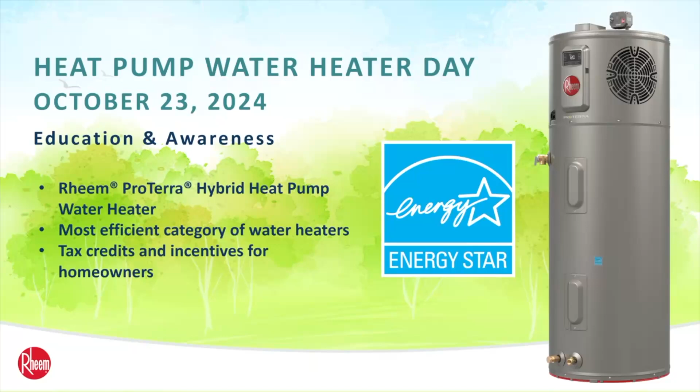We're coming to you live today because it is National Heat Pump Water Heater Day. Joining me is Robert Hayworth, one of our plumber support managers. He's going to step you through some of the heat pump water heater technology and these Proterra units, talk about some of the features and benefits, and also the things you need to know as the plumbing professional who is selling, installing, and servicing these units.

Thank you, everybody. Thanks for having me here for this great occasion, which is Hybrid Heat Pump Water Heater Day. Today we're going to discuss a recap of our hybrid water heaters. We have a Generation 5 out in the marketplace, and we just came out with our refresh. I'd like to talk about the bells and whistles, benefits, and how the system works. Right here behind me is our 40-gallon hybrid builder model.

So this is a hybrid heat pump. What is a hybrid heat pump? It's two units together that create hot water. This is a heat pump, like a reverse refrigerator, and this is a traditional electric water heater with the elements. Next to it is our refresh, and we'll talk about that in a second. But how does a hybrid water heater work?

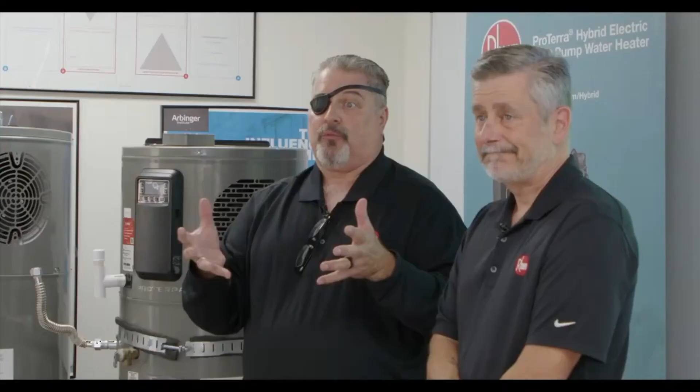With NAECA 4 in place, which means the government is actually enforcing energy savings on water heaters, a lot of the water heaters on the market today are going to be gone in 4 years. So might as well act now with the rebates and incentives that are on the marketplace, so that in 4 or 5 years the customers won't get that sticker shock.

Now if you're going to run ducting in the attic, you got to treat it like plumbing, guys. You can't have hills and valleys in plumbing, right? So when you do ducting in your attics, make sure that ducting is as straight as possible, because for every up and down bend you get in there, you have restriction. And that restriction creates back pressure on the system, which will cause problems. So you want it as straight and clean as possible, without any restrictions.

If you've got a full length of ducting, don't compress that ducting and hook it up just because you only need 5 feet. Cut it. You want that to be a pure 5-foot piece instead of a compressed 10-foot piece, if you're doing that flex.

Any questions on ducting? There's more stuff you can do.

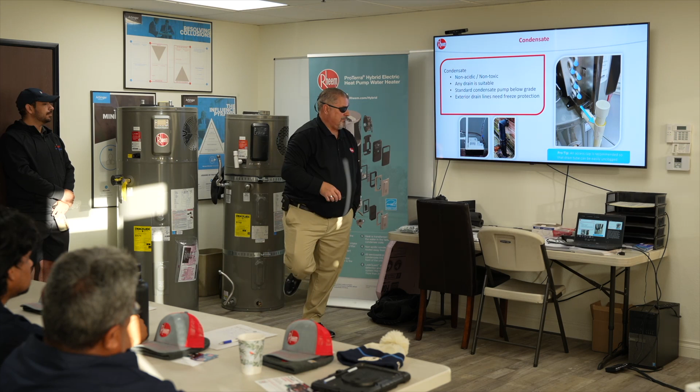Condensate, I already told you about — just make sure you take care of it. There are leak sensors in there, so just like on the AC system, if that pan inside fills up with water, it has a leak detector in there, and it will throw a code and shut the system down.

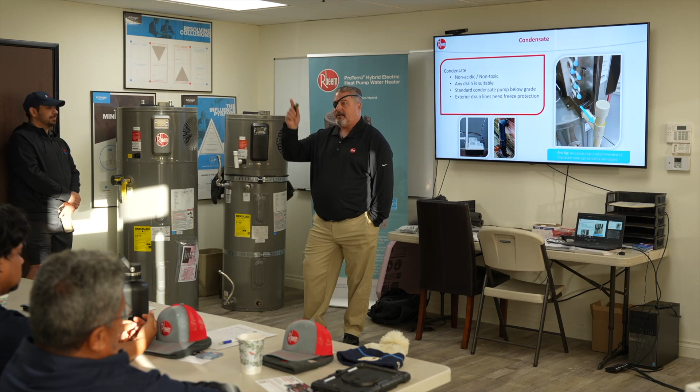The cool thing about this system is that if there's ever any issues with the heat pump side, you can switch it to the electric side. So you can call your customer, say Mrs. Jones, switch it to electric only until we get out there, so that way you have hot water while we fix the issue with the heat pump. Or vice versa — turn off the electric and turn on the heat pump. You can actually do both sides, so the customer, or you guys, have the ability to switch it between the modes.

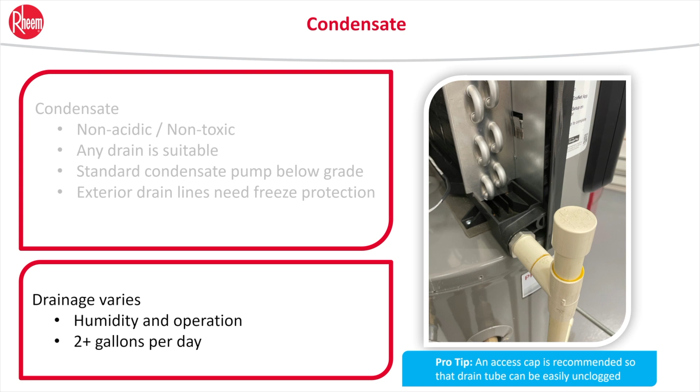PVC or CPVC is recommended. It's 2 gallons per day, not a lot of water, right? But if somebody's on vacation for 2 weeks and the AC system shuts down, and you have it tied into AC, 2 gallons a day can cause a lot of damage to the house.

How are we doing on time? Doing good? All right, once again, noise - just be familiar with your areas, okay, where you're placing it. Make sure you have your isolation stuff in there.

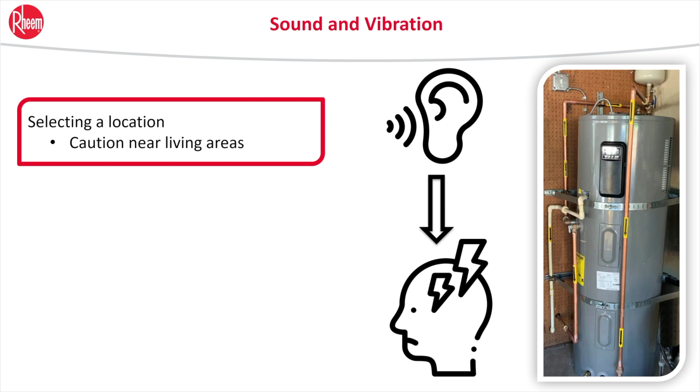I had a plumber get a call in the middle of the night because the guy's trophies on the back wall in his man cave fell off because of vibration. So it can happen, okay? We can have isolation kits as well, so there's also those you can purchase.

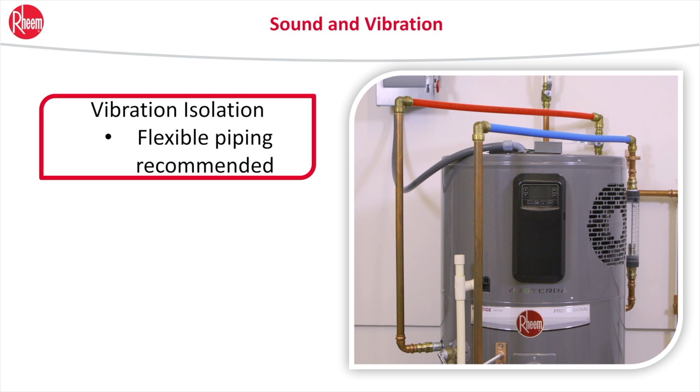Once again, flex - I know you're all looking at that saying, SharkBites? Do whatever you want to do. This is just for demonstration purposes. All right, how do you get it from point A to point B?

What's the proper way? Especially if you're going to be going down a country road, you want to make sure that the vibration is eliminated, right? We recommend that you transport these bad boys straight up. That's not going to be possible all the time, right? So if you have to lay them down, there's only one way to lay them down to make sure there's no issues with the system.

Once you get the box - and we have the box outside so you can look at it - on all three sides there's going to be a label that says hybrid. There's one side that doesn't have anything on it. That one side has to be faced up into the ceiling. And the whole purpose of that is there's a compressor in here, right?

Have any of you picked up a compressor before? Is it light or heavy? It's heavy. So what happens is if that compressor's laying down on its side and you don't have it in the right position, it's going to vibrate and move. What could happen is it could go out of position, rub up against some metal or pipe, and cause a little humming noise or vibration inside the system before you guys even do anything. So if you place it the right way, there's protection inside to keep that in check.

When you put it in your trucks, put some blankets underneath there, or a towel, or foam, and strap it down, especially if you know you're going to go up in the mountains or on bouncy roads. Just protect it as much as possible.

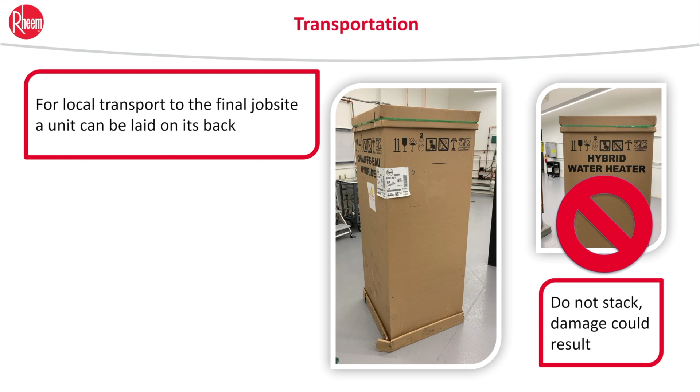Now another question that always gets asked is, you can't lay a refrigerator down - if you do, how long does it take for that refrigerator to recover? This bad boy right here can recover within the hour. We design it a certain way so the fluids don't get lost all the way, and once you stand it up, within an hour's time you're basically ready to go. But give it that little bit of time before you turn it on.

You just can't slap it in there, fill it up, and turn it on. You've got to give it a little bit of time to recover. Any questions on transporting? Okay, that right there will save a lot of issues out in the field.

All right, we already talked about that - sorry, I skipped through it. Recirc - you can add recirc on here.

If Mrs. Jones out in the field wants to have recirc 100% on all the time, this system is not for her, because the recovery factor is just not there. It's designed to operate with an on-demand pump system and a sensor with temperature up to 102 degrees, so that way it has it in check - it comes on once in a while, not all the time.

So it can have recirc. What else can it do? Well, what other kind of recirc? There it is, 102 - I was right. I thought, did I say it right? I said it right, 102. All right, I'm not that old after all.

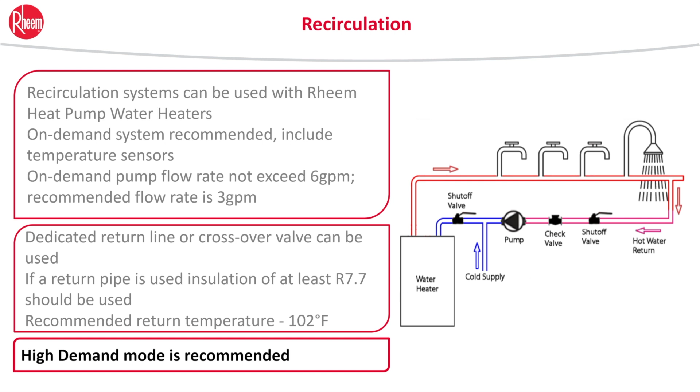Crossover tees, let's see... So there's a PDF out there that we can provide you, especially out in the plumbing world, that shows you step by step how to do recirc. And it's also in the app, so just so you guys know that's available, we can give that to you if you need it.

Why is not my crossover tee in here?

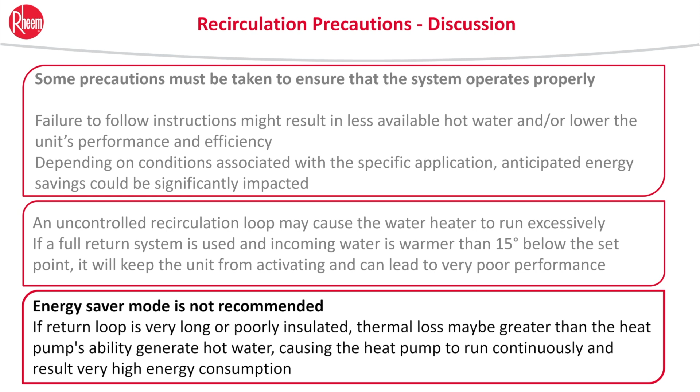Somebody asked me if they can do a crossover tee. They did a crossover tee one time, but it has to be a timer-based system. Remember, on your controller you can do an app and schedule it. So if you do a crossover pump system, you can actually do that on a timer base.

Title 24 here in California wants on demand. But out in the marketplace, plumbers have put them on with a crossover tee as long as the pump is scheduled with the app. Can we put like a comfort series bypass system on there?

Yeah, so you have to utilize the clock. So if your clock's going to be from 5 a.m. to 8 a.m. on your app, that's in high demand mode. You want high demand mode functionality on that type of install. Any questions? All right.

Simple, easy user interface. Enabled is pretty simple. On, off. Quick and easy, okay? Temperature, up and down, quick and easy. You can also do all that with your app. On, off, up and down, okay?

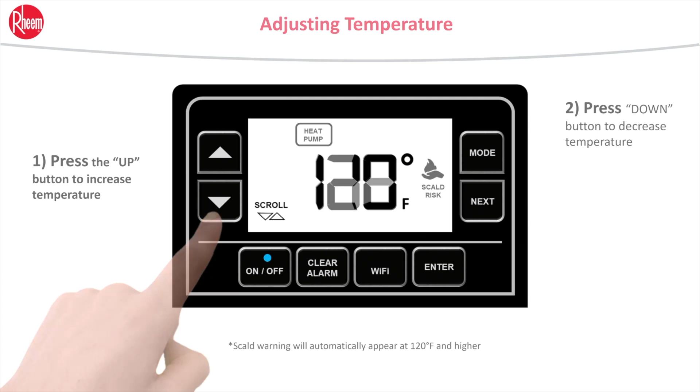Mode settings, just hit your modes. There's multiple modes on here, and we'll go through that real quick. Just hit mode, and these are the modes that you have. You have energy saving mode, it's a default, so if you don't want to touch it, you just plug it in, fill it up, get the water and air out, turn it on, it's automatically energy saving. If you have a bigger unit, 40 gallons would be okay, you can do that with, but a bigger unit, 50, 65, 80, it is recommended that you switch it to high demand mode as soon as you get all the air out.

Anybody want to tell me why that would be a good thing to do? Because energy saving mode switches to heat pump only. 80 gallons of water, especially in the wintertime, is going to take a long time to recover, right? So as soon as you're done, switch it to high demand mode. That 80 gallons is going to switch on the elements and the heat pump and heat up faster.

You still got to clean up, still got to do the invoice, right? So you got about 15, 20, 30 minutes right there. That extra little bit is going to get a boost to that system and let that customer not call you. I've had plumbers call me and say, hey, we installed this 3-4 hours ago and the customer doesn't have hot water. Well, what'd you put in? An 80-gallon unit. How'd you put it in? We just hooked it up and go. Well, what's the weather like there? It's pretty cool today, it's going to take a long time. Switch it to high demand, got that double heating source, boom.

Usually they say, my son did that for me on a test. I said, hey, switch it to high demand, tell me how fast it takes to heat. You guys have been plumbers for a while, a 50-gallon water heater takes what, 45 minutes, an hour on normal? Even on gas sometimes less. So electric water heater, 50-gallon, an hour. My son hit high demand on a heat pump, 50-gallon, 25 minutes. 50 gallons in 25 minutes. So high demand works even better than traditional water heaters.

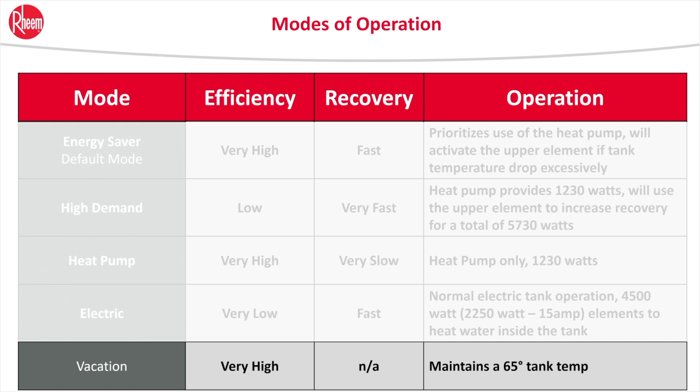One call I got from a plumber: his customer called saying he's in Europe and he's getting reports on his phone that the unit's not turning off, but he's gone for a month. It maintains a temperature of 65 degrees. It does not shut off.

Anybody here want to tell me why it maintains a temperature of 65 degrees? Nope. Anybody know what Legionnaire's disease is? You guys don't know what Legionnaire's disease is? So Legionnaire's disease is bacteria growth in water from being in storage.

Why is it called Legionnaire's? You guys want to hear the story real quick? All right, real quick guys. Back in the day in Philadelphia, there's a big convention, Legionnaires—you know who those guys are, right? Legionnaires, Legionnaires, so they had a big convention.

This hotel had half the hotel shut down, so their storage units were dormant for 6 to 8 months. Big old thing, turned on the units, didn't flush them out. Multiple Legionnaires, army guys, whoever you want to call them, died because of that bacteria. So that's why it's called Legionnaire's disease, because of that.

So this helps maintain that temperature so that bacteria doesn't grow in the system. So let your customers know vacation mode means it's going to maintain that temperature for your safety. Good? All right, see, Rheem cares. Rheem cares.

Settings—this is just quick and easy, I'll go through it real fast. It's real simple and easy to hit your system. This whole setup here is in your app, guys. If you want to learn how to do settings and modes and all that, it's in the app. Quick and simple, bump, bump, bump, and it will tell you step by step how to do your mode settings.

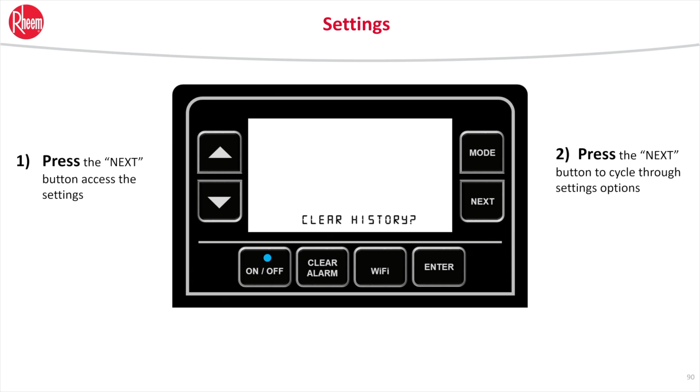That's your Wi-Fi. Next, network assistance—this is all for your EcoNet stuff. Okay, once again, it's beyond me, so I have to read the book again. SOV—anybody want to tell me what SOV is?

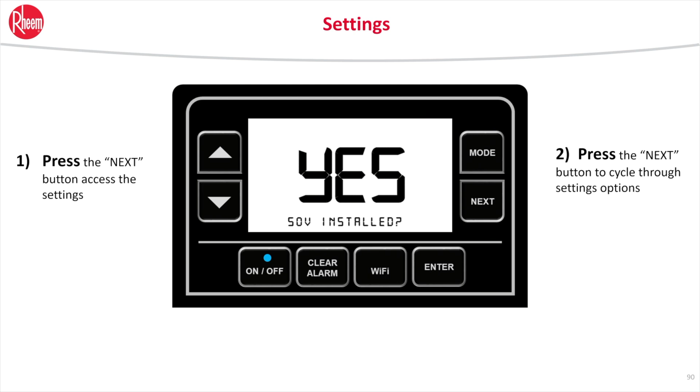Nope, it's a shut-off valve. That's important, because if you put a shut-off valve on, it doesn't come with it automatically on, you got to make sure you turn it on. A lot of plumbers have put shut-off valves on later and forgot to flip that, so it's not working. Cool thing about our shut-off valve is it actually maintains itself.

I think every 2 or 3 days it actually turns on and off to keep that valve working. How many times have you gone out to a job and thought, man, I can't shut the water heater off? The shut-off valve is not your main valve, guys. So if you do an install and it has a shut-off valve, still replace the valve up here if it needs to be replaced, because this is your main valve. This is just an emergency valve to stop it from leaking.

Error codes, we're just going to jump through this. How much time we got left? 7 minutes? 20? We got time, good, good time for questions and stuff. I love it. You guys hearing me okay? Your ears don't hurt yet?

Test mode, how cool is this? You can go into test mode and find out how everything works without having to pull out the multimeter and stuff. You want to see how the bottom element's working, you can go into test mode, switch it to bottom element, it'll kick on and tell you the amps and draws and all that stuff. Compressor, kick on the compressor, see the power source, draws, all that stuff. Fan, kick on the fan, turn on the fan, see if it's working.

So the thing is, if you go out to a call and it says there's a fan bad, is it always the fan if the controller says it's a fan? Not necessarily, right? I always recommend doing that test setting, make sure, because what if you do a test setting and all of a sudden the fan kicks on? Then there's something else causing the fan not to work, so you got to figure out what's causing it. A lot of times it could be the control board, or it could be a disconnect inside, and I'll talk about that in a second.

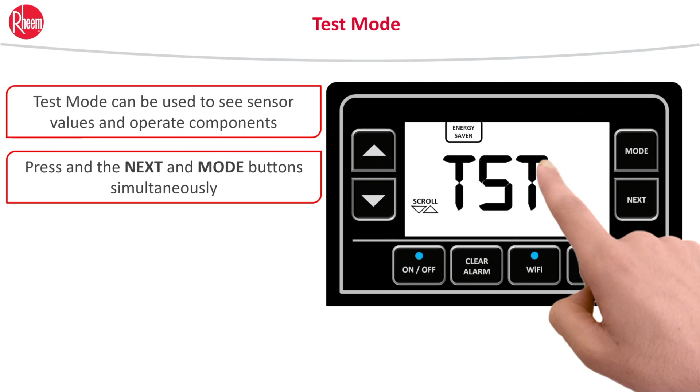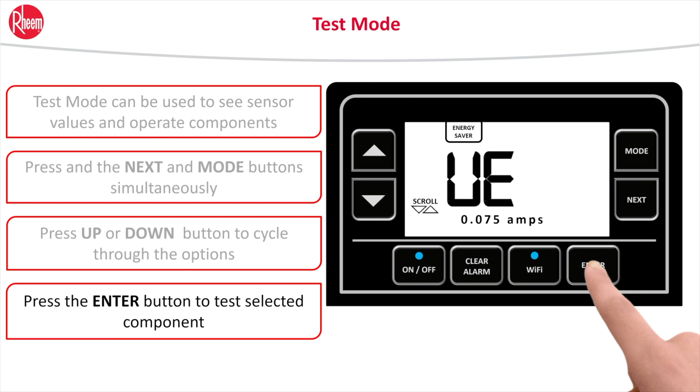But yeah, you can go through the whole system and test all the products and see what you got, your temperatures, your adjustments. It's just awesome, I love it. But when you call tech support, they're going to want to verify that the fan's bad. So even though this says it's good, you still might have to verify 100% that it's bad. That's just the way it is.

This is just your menu structure. All this is in your app. You get this whole detail in your app too. So if you go through there, it would tell you step by step how to do everything.

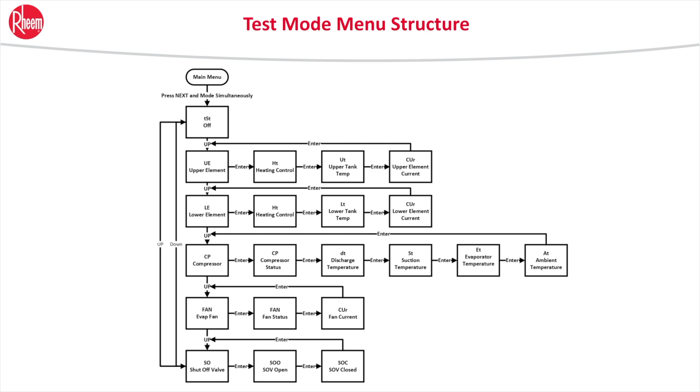I know only 2% are going to remember all this stuff right now anyways. The rest of it's just going to go in one ear and out the other until the donuts are in the belly, that's when everything is forgotten. But that's how it is. So it's pretty cool how you can go through and check everything out. Like I said, that's a whole new class in itself, and that's available through Rheem too.

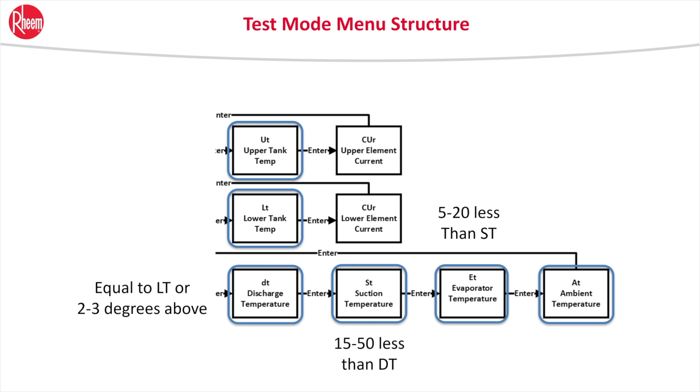Here's your modes, these are your sensors. You actually have 6 air temperature sensors. All the sensors are the same exact thing, but what they do is test the ambient air, the refrigerant air. It tests all the different stuff inside the system to make sure it all works. And how you test it is pretty common, you got to make sure the temperature regulation is there.

So when you do your testing, you got to use this chart. Once again, where's the chart going to be? On the app, all right, there you go. Or in the use and care manual. You guys keep your use and care manuals, or you guys still use them for doorstops? Yeah, so that's what I thought.

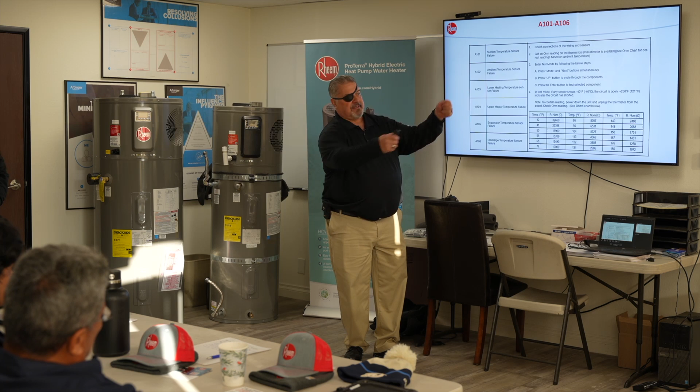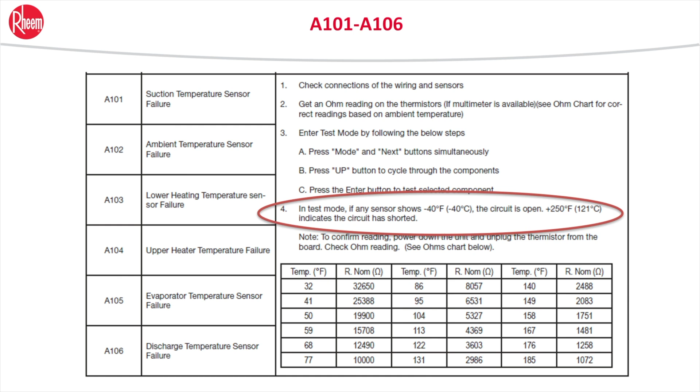But the most important thing, when you do a test on a sensor, so you guys know out in the field real quick and simple, is this one right here. If you get that reading when you do a test right away, that sensor is bad. That's the fastest way to find out, you don't have to worry about the temperature and all that stuff. If you get a reading like that, it's pretty much going to guarantee that sensor is bad. But if it doesn't show that, then you got to make sure your temperature regulations are there, you got to test the temperature. It's a little complex, but it's not too bad. Once again, that's a whole class right there in itself.

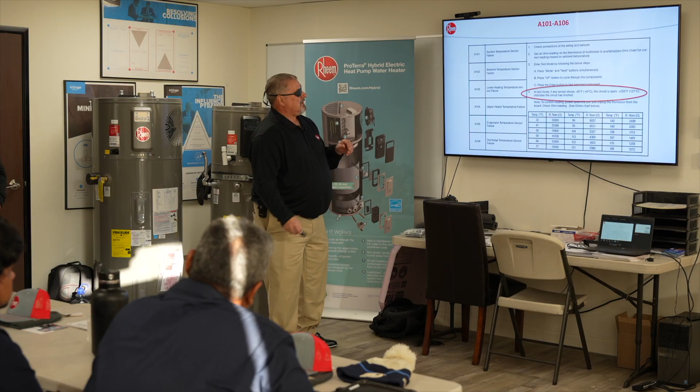This is a breakdown, this is what the sensors look like.

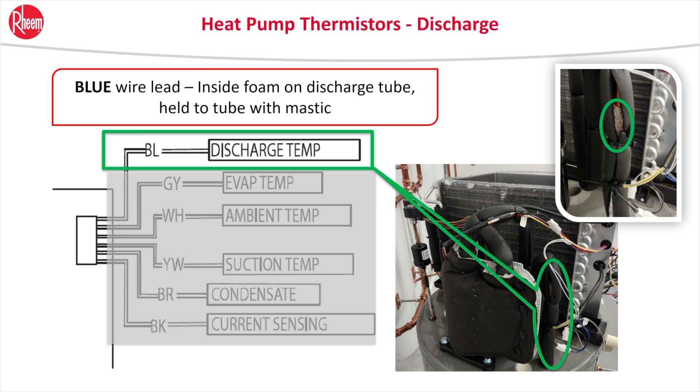Location. All right, you said I got 20 minutes? All right, I took the liberty of taking all the screws out of this already.

The first thing I tell my plumbers when I train them is check your wiring. Most of the time, especially in transit, there's a lot of movement and vibration going on from point A to point B to the customer. If a wire wasn't connected properly, there's a chance it can pop off. Always check your wires before you do anything, guys. Simple and easy.

Take this bad boy right here. See? Fingers, no fingernails, all right? I'm a plumber, no fingernails.

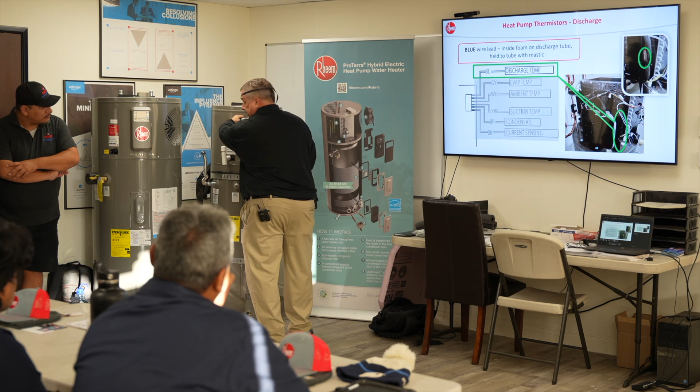All you do is take 2 screws out. I just did this for show, just to show how easy it is. And just so you guys know, I took the wires out already, so when I open this up it's going to be a mess, but I pulled the wires out already just for time constraints, because it takes a few minutes to take all that out. First thing you do is pull this out. When you pull it out, it's going to drop a little bit. It's not going to come completely out because all the wires are connected. This one is not connected because I took the wires out already. Normally it's going to drop like this and the wires are going to be connected. Cool thing is, the wires only go one place.

Every one of you out there in the world and here in the classroom, always take a picture, please. Sorry, I'll pick those up. Everything's marked, but it's a whole lot easier if you took a picture, because all you got to do is hold your phone up here - blue, red, green. It makes it a lot easier. Do that on all the products. Take your pictures before you take anything apart, take the picture.

So this is what you guys will do when you want to take the controller out. But you check all the wiring to this to make sure it's all in there solid. That's the first thing I always tell the guys to do.

Now there's another set of wires I want you to check too, because there have been issues out in the field, and it's on this bad boy right here. What is this right here, guys? What does a capacitor do? Helps jumpstart the motor. It's basically a battery.

How do you test it? You put a voltmeter on it. You don't do a 9-volt test. You all know what a 9-volt test is? If you do a 9-volt test on this bad boy, you might not wake up. Or you're going to have a bad hair day.

Always check the connectors here. Sometimes one of these wires could be loose or taken apart, and it will cause an error code. I had a plumber go through tech support and try to figure it out - 7 hours it took him to figure out it was just one wire off. Took me how long to pull this apart and look inside? 30 seconds. So if he would have been trained to check the wires real quick, problem solved, saved him 7 hours. Always double check that right there.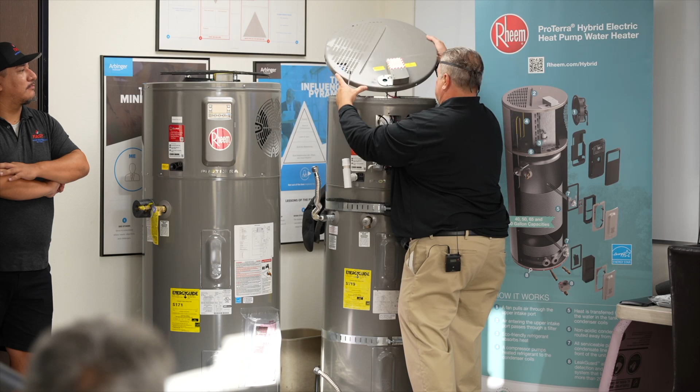This is a brand new one, I'm not going to take this one apart. Take your screwdriver, tap it, and the whole system comes off, right? There's going to be about 5 screws on top, 4 screws on the side, 4 screws on the other side. Unfortunately, if you have a condensation drain, you have to take it apart.

Pull your condensation drain out. On this one you shouldn't have to, but I always do if it's going to be in the way. All right, give me a hand, guys.

I haven't sweat in 2 years. All right.

So for you guys out here and in the field, you have to do this to take the fan out, okay? The only reason I want to open this up is so after the training you guys can come up here and look at it and find the locations of all your connections.

So all these connectors here are going to be your thermistors. Plug and play, you just pull it apart and put the new ones in. One thing I want to stress is when you do that, you're going to have to take it away from the insulation, okay?

You want to make sure that insulation is covered on it, or add more insulation. What I recommend is you can take some more of this, cut a small piece off, and put it around where the sensor is to help protect it. That sensor has to sense the temperature of that pipe, okay?

Do not use tape, zip ties only. Tape inside might melt or come apart and get into the system. So when you change out the sensor, make sure it's protected and covered when you change them out.